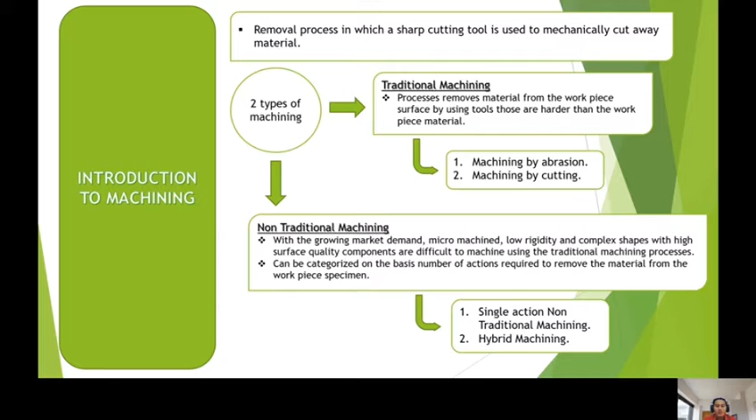Traditional machining is a process that removes material from the workpiece surface by using tools that are harder than the workpiece material. And non-traditional machining can be categorized on the basis of the number of actions required to remove material from the workpiece specimen. For traditional machining, there are two examples.

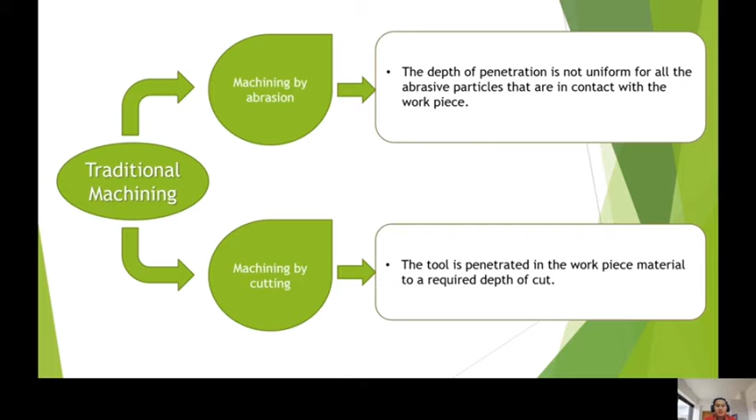Machining by abrasion: we can see the depth of penetration is not uniform for all the abrasive particles. And machining by cutting: the tool is penetrated into the workpiece material to the required depth of cut. For non-traditional machining, there is single action non-traditional machining, with three examples.

Thermal machining: a single machining action is required to remove material from the workpiece. Mechanical machining: mechanical abrasion is the main mechanism for material removal. And chemical and electrochemical machining: the ion transfer in the electrolyte solution results in material removal. The process of ion transfer is known as electrochemical dissolution.

For hybrid machining, there are two examples, hybrid thermal process and hybrid thermal electrochemical and chemical process. Thermal energy is the main source of material removal, and the material removal process becomes more intensive with the combination of different phases.

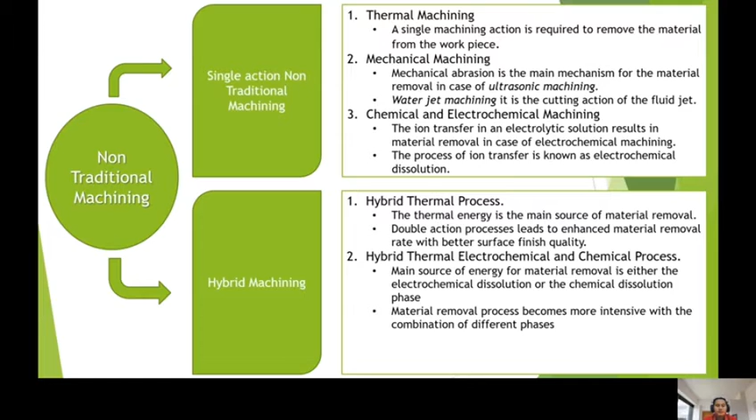We'll be talking about the theories of friction. So we'll go into the deformation theory, ploughing. When adhesion is small, ploughing becomes dominant. If one surface is harder, asperities may penetrate and plough the softer surface. This produces grooves when shear strength is exceeded. This may also occur due to entrapped wear particles, known as the third body abrader.

Interactions between two rough surfaces, known as the mechanical interlocking of the micro or macro structures, cause the ploughing of the surface. Ploughing is when there is an increase in friction and the creation of wear particles. This increases friction in the wear system.

As you can see on the left hand side, this is the schematic diagram for three deformation zones in machining. There is the workpiece, flank wear zone, primary shear zone, secondary deformation zone, and the tool used for this ploughing technique.

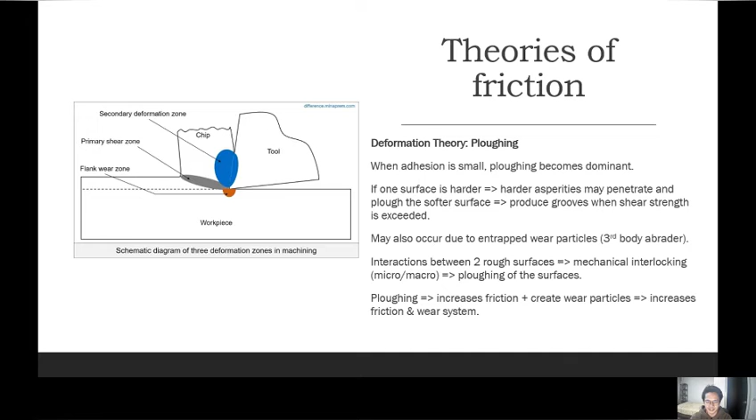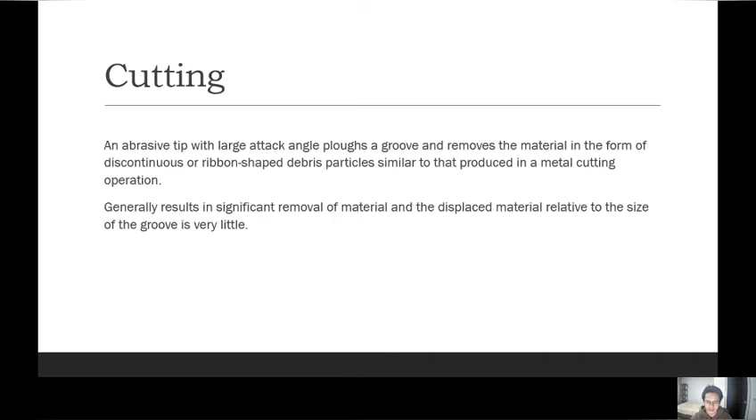Next will be cutting. An abrasive tip with a large attack angle ploughs a groove and removes the material in the form of discontinuous or ribbon-shaped debris particles similar to that produced in a metal cutting operation. This generally results in a significant removal of material, and the displaced material relative to the size of the groove is very little. For example, abrasive wear.

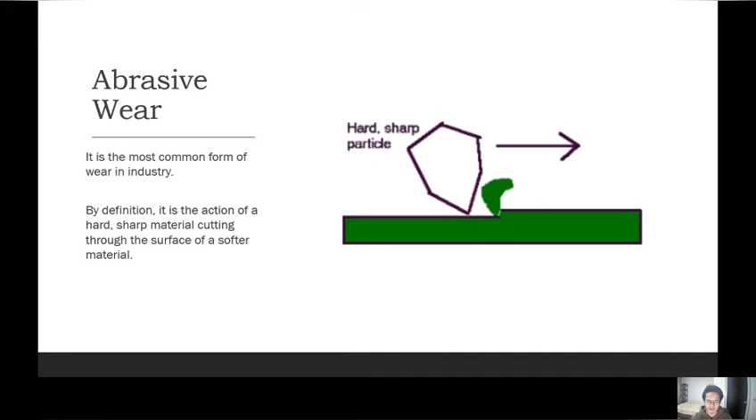Abrasive wear is the most common form of wear in industry. By definition, it is the action of a hard, sharp material cutting through the surface of a softer material. The material is removed by contact with hard particles. The particles either may be present at the surface of a second material or may exist as loose particles between two surfaces.

Abrasive wear can be measured as loss of mass by the Taber abrasion test according to the standards ISO 9352 or ASTM D1044. The abrasive wear mechanism is basically the same as machining, grinding, polishing, or lapping that we use for shaping materials.

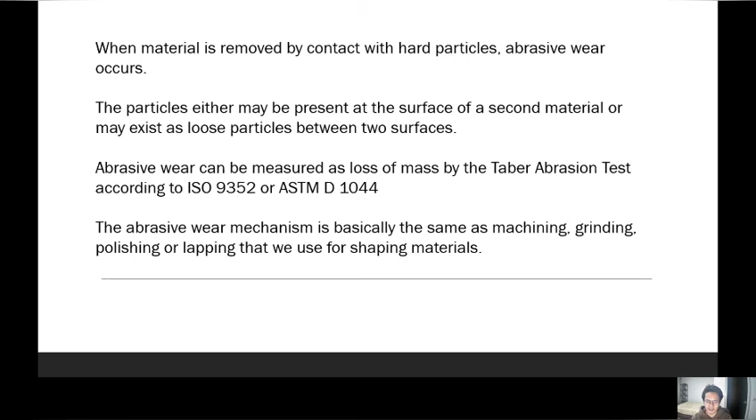Abrasive wear occurs in two general situations. The first one, based on figure A, is two-body abrasion. It occurs when the hard surface is the harder of two rubbing surfaces. For example, grinding, cutting, and machining.

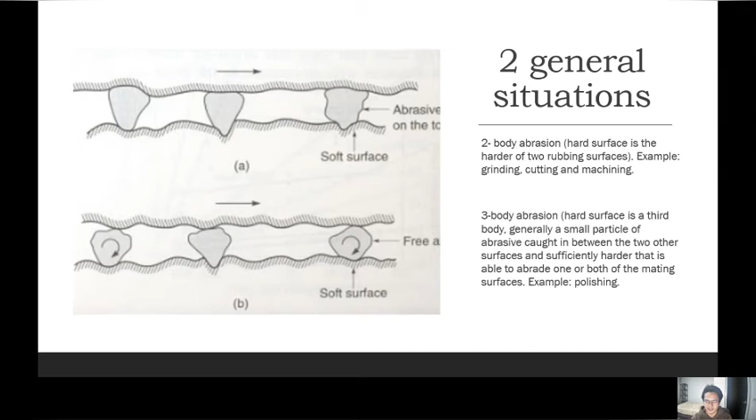And figure B is three-body abrasion. It occurs when the hard surface is a third body, generally a small particle of abrasive caught between two other surfaces and sufficiently harder that it is able to abrade one or both of the mating surfaces. For example, polishing. My name is Mohamad Haziq and I will be presenting about lubrication application in machining technology.

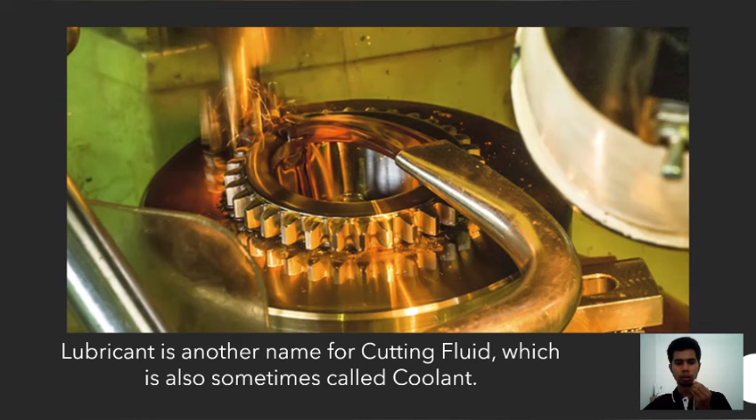Lubricant is another name for cutting fluid, which is also sometimes called coolant. There are two main functions of lubricant in machining. The first one is lubrication, lubricating between the tool's cutting edge and chip to prevent heat and friction. The second point is to prevent chips from being welded onto the tool. A third point, extreme pressure additives are sometimes added.

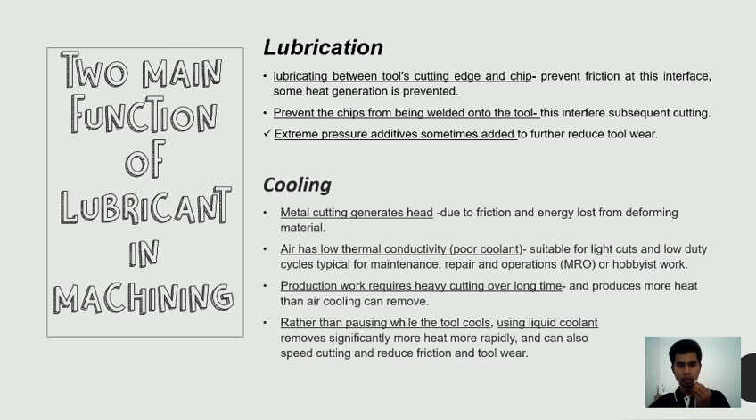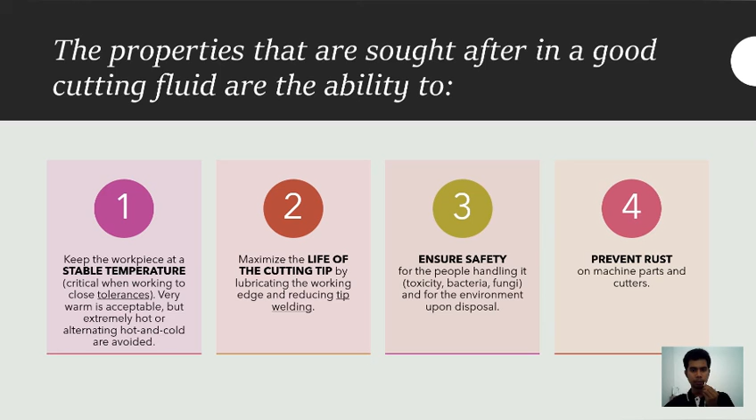So the second function is cooling. Metal cutting generates heat due to friction and deforming, and air has low thermal conductivity. Production work requires heavy cutting over a long time, and rather than pausing the tool to cool, we use coolant. A good cutting fluid is able to maintain a stable temperature, maximize the life of the cutting tip, ensure safety of the people handling it, and prevent rust.

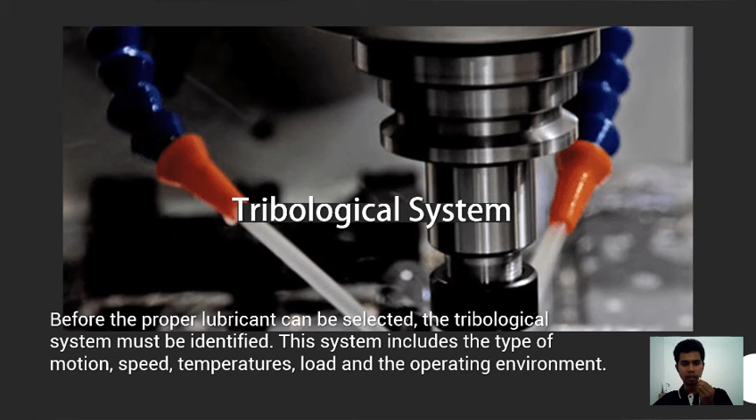Tribological system. Before proper lubricant can be selected, the tribological system must be identified. The system includes 5 factors. There are 5 considerations before choosing a cutting fluid. The first one is type of motion. Is it sliding or rolling? The second one is the speed of the machining. The third one is temperature, because every lubricant has its own optimal temperature.

The fourth one is load. Is it light load or heavy load? And the fifth one is operating environment. Does it involve moisture or vacuum? And is there presence of certain chemicals?